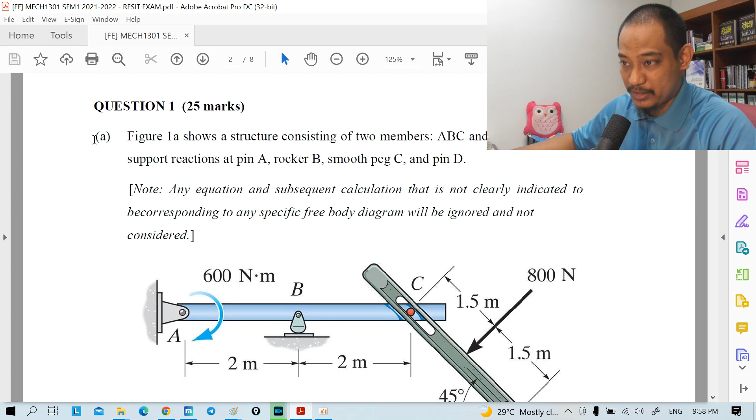Alright, so let's take a look. We have 4 questions. Question 1 is 25 marks, with part A and part B. Question 2, 25 marks, with part A and part B as well. Question 3, also 25 marks, with part A and part B. And question 4, 25 marks as well, with part A, B, and C. And then we have the appendix with a table.

So meaning what? We have 4 questions, and under each question there are multiple parts, but each question block is allocated 25 marks, meaning each question carries a quarter of the full marks for the final exam. So in terms of time allocation, we can divide the 3 hours into 4 equal portions: 45 minutes, 45 minutes, 45 minutes, and 45 minutes.

So without further ado, we'll go straight to question number 1 and allocate 45 minutes for that at most. So it should be done before 10:45. Let me note down here: from 10 to 10:45. I'll take note of the time as such, even though we actually began 3 minutes before 10, so we'll just minus 3 minutes. But it's easier for me to think of it as 10 to 10:45.

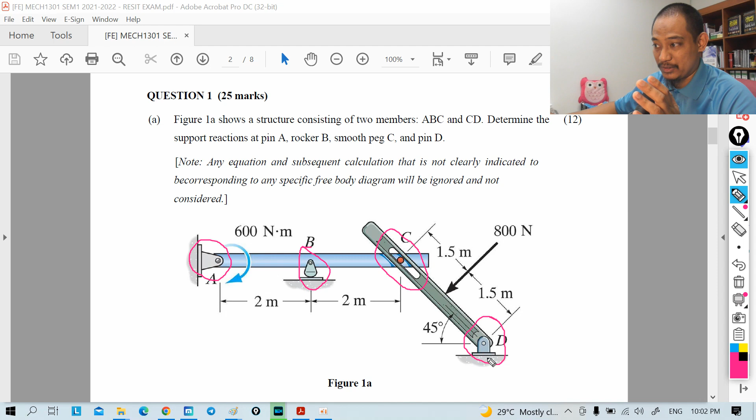So you have a support reaction or normal reaction there, and then at pin D, we'll have this is a pin, so we have X and Y components. So that is what we need to find. So let's proceed to answer this one.

Alright, let's put this here. We'll first take note of what is the important information, and then we can answer. So this is Bismillah, question 1A.

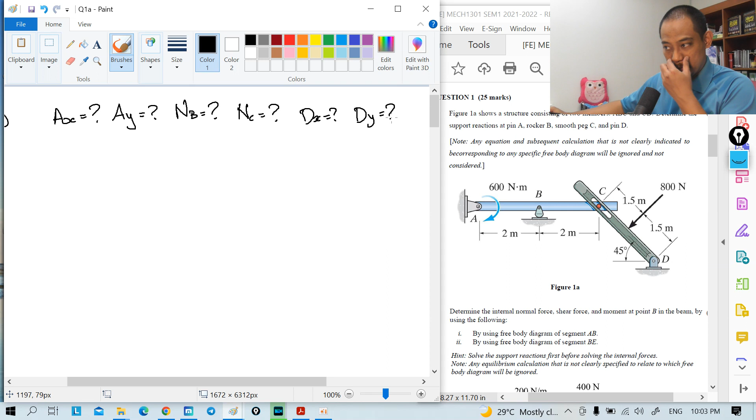We have to find AX, AY, and then NB, and then NC, and DX, as well as DY. So those are the unknowns that we have to find at A, B, C, and D.

Let's first draw the free body diagram. We have two members, so free body diagram. On the left we have this member, where we'll have AX and AY, and then we have a moment there, and we have a normal reaction at B, and support reaction at point C here.

That will correspond to that member there. Okay, something like this. So this corresponds here, and then we have a force like this, and then we have DX, DY. Let's assume this direction. Here it is 800 Newton.

This is a normal reaction, so we have normal C, so corresponding to it we'll have something like this, normal C. And then here we have NB, so we have AX, AY, and the value is given as 600 Newton meter.

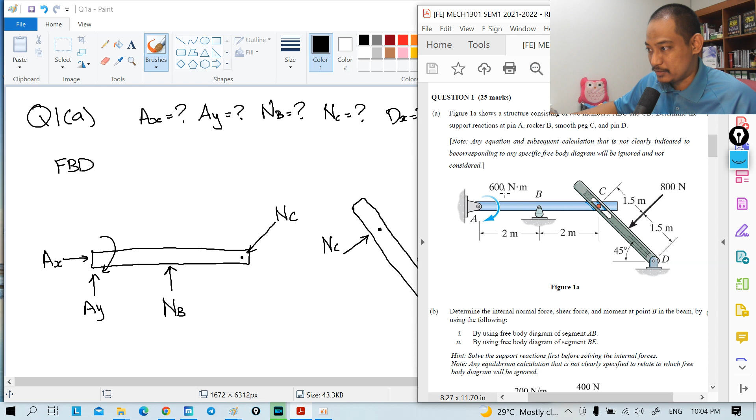600 Newton meter, and in terms of distance, this is 2 meters. This distance is also 2 meters. Of course, this is not really at the end, but it doesn't matter because this point is what is important.

So this one is DX DY, and in terms of distance, this is 1.5 meter, and this is 1.5 meter. I'm sorry, my handwriting is so bad tonight.

And then we have the angle here. This is quite messy. The angle here is 45 degrees, meaning this angle is 45 degrees, and this angle is also 45 degrees.

So we have two free body diagrams, and the rest we can calculate, so we'll just focus on this. Let's label this as free body diagram ABC. This is member ABC, let's call it, and this is member CD.

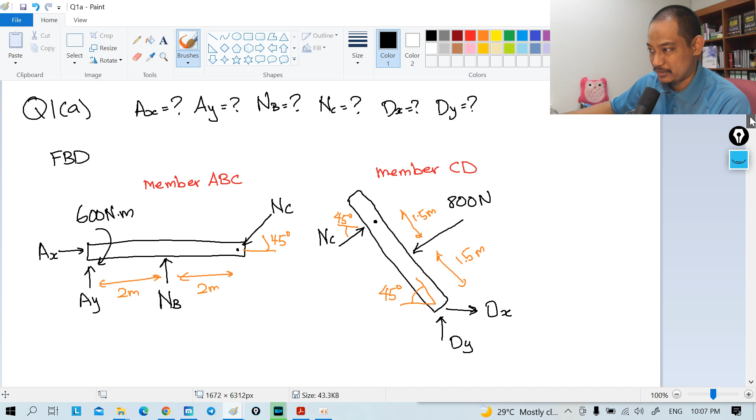Using the free body diagram of member CD, we'll begin with moment about point D. Summation of moment about point D equals 0. Let's take counterclockwise as positive.

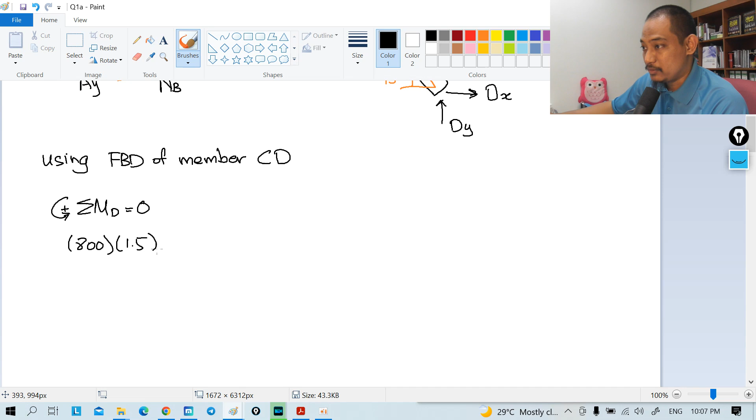So 800 times 1.5 is perpendicular straight away, so NC - in this case it's perpendicular as well. That angle doesn't matter because let's check with the original diagram. Is it perpendicular? Yes, because the slot is parallel to this one here, so the reaction should be perpendicular.

So we'll have straight away minus NC times the distance of 3, equal to 0. So NC equals - bring to other side, divide - becomes 400 Newton. So NC is one of the answers, 400 Newton.

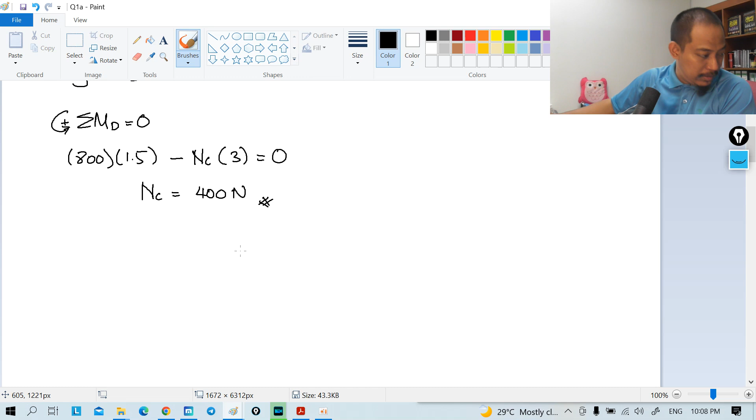Next is summation of Fx equal to 0. If we take positive to the right, we want to solve for DX. So there we will have DX to the right, and then minus 800 Newton. The angle will be the same because this would still be 45 degrees. So minus 800 cos 45 degrees, and then we have NC plus NC cos 45, and NC we already have as 400, so plus 400 cos 45 degrees equal to 0.

So what's my calculator? We have minus 800 times cos 45 degrees, plus 400 times cos 45 degrees, and bring to the other side, so DX equals 282.84 Newton. Let me double check: minus 800 times cos 45 plus 400 times cos 45, 282.84.

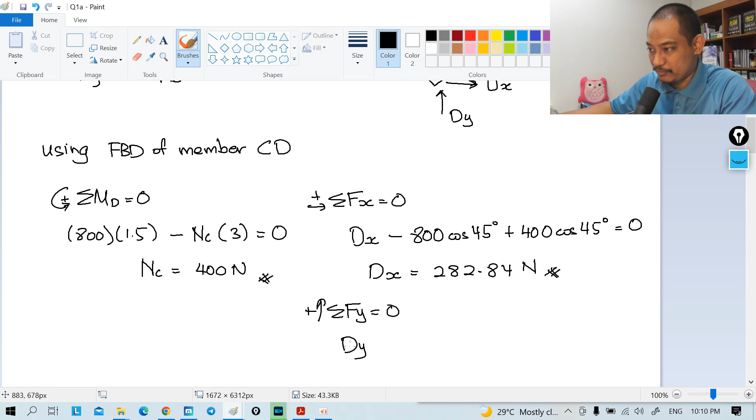Right, so that's one of the answers as well. Next, summation of Fy equal to 0, upwards as positive, so we'll have Dy and then 800 downwards sine 45, so minus 800 sine 45 degrees, and then we have NC upwards sine 45, so plus 400 sine 45 degrees equal to 0.

So from here, Dy equal to minus 800 times sine 45 degrees plus 400 times sine 45 degrees. It should be the same, right? Because sine and cosine is the same. So bring to the other side, so you have 282.84 Newton. That is the answer for that one.

So we have solved 3, we need to solve 3. So now we go to member ABC. Now, from free body diagram of member...

ABC. Now, is it compulsory to write this statement? If you are in my class, it is compulsory, because any equation that is not clear, this is linked to which free body diagram, I'll just ignore it, right? So if you're my student, you know that policy from the beginning. Meaning that if you do not draw any free body diagram, then I'll ignore everything. If you draw like this, you have two free body diagrams but there's no label, and then suddenly a question comes up and I'm not sure this is linked to which, I'll just ignore as well. So make sure it is precise to show that you understand what's going on and it's not random and coincidental.

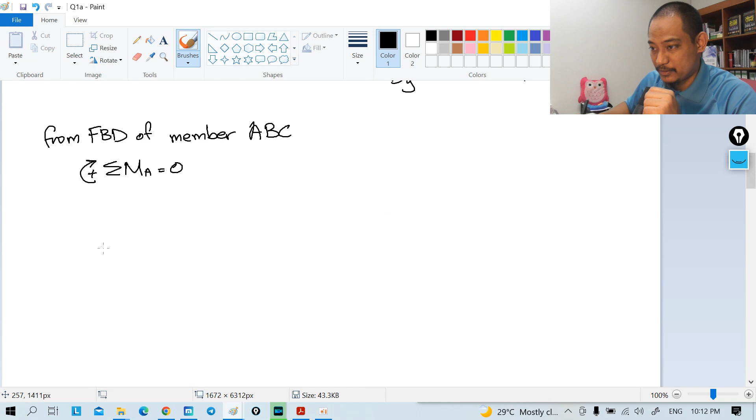Alright, so here we'll take moment about point A. Summation of moment about point A equal to 0. Let's take, because that 600 is clockwise, so let's take clockwise as positive. So we will have that 600, and then NB is counterclockwise, so negative NB times 2, negative NB times the distance of 2. And then for this one, horizontal NC, horizontal doesn't produce any moment, the vertical one produces, so that's clockwise. So NC sine 45 times 4, and NC we already solved, right? So 400, so plus 400 sine 45 degrees with the distance of 4, that should be equal to 0.

So we have 600, we have NB, and then we have NC. And then just straight away calculation. So 600 plus 400 times sine 45 times 4, you have a number, and then bring to the side, divide by 2, you have NB equal to 865.69 Newton. Double check: 600 plus 400 times sine 45 times 4 and then divide by 2, 865.69.

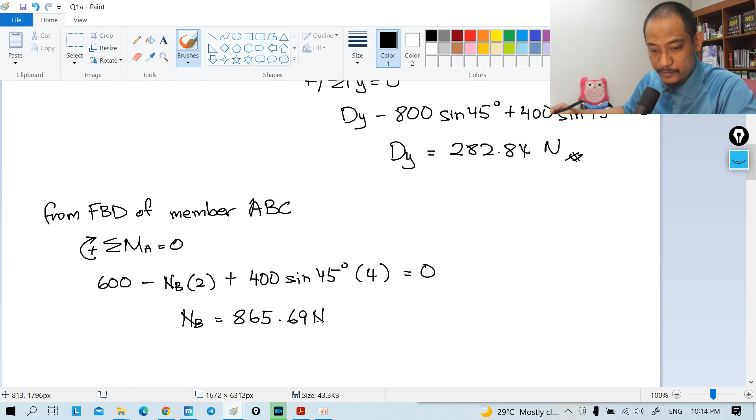Then summation of Fx equal to 0, positive to the right. So you have Ax, and NC, right? So nothing else except NC to the left, so minus NC cos 45, so minus 400 cos 45 degrees equal to 0. So this is straightforward, so 400 times cos 45 degrees, so you have Ax equal to 282.84 Newton, right? So there you go, is this 400 cos 45.

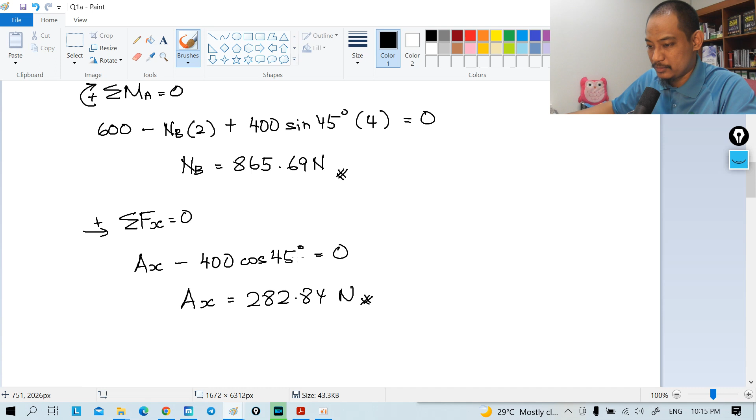Alright, and then we have summation of Fy equal to 0, taking positive upwards. So you will have Ay, and then plus NB, and NB is that one, right? That one, so plus NB, so plus 865.69, and then minus NC sine 45, so minus 400 sine 45 degrees equal to 0.

Minus sine 45 degrees. Alright, so in that case Ay equal to, so if you calculate 865.69 minus 400 times sine 45, so bring to the other side, so it becomes negative, right? Negative 582.84 Newton. Negative means Ay is actually downward. So it means it is downward.

Alright, so we have 6 unknowns that we have to solve. So 1, 2, 3, 4, 5, 6. Alright, so that's for question 1A. Hopefully that's clear and no problem there. We'll go straight to question 1B.

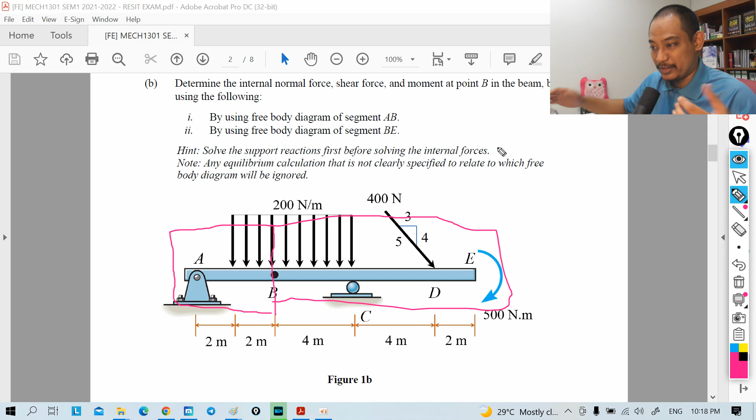You should know that in this case, either side you have to solve this one and this one, right? Because otherwise you cannot solve. So it should be based on understanding. But here the question really wants to give the student the chance to know where to start.

So solve the support reaction first before you can cut into the internal loading. Note, any equilibrium calculation that is not clearly specified to relate to which free body diagram will be ignored. Make sure you specify this equation is based on or for which free body diagram.

Alright, so first we will draw a free body diagram of this whole thing, and find the support reaction first before we can find the internal loading.

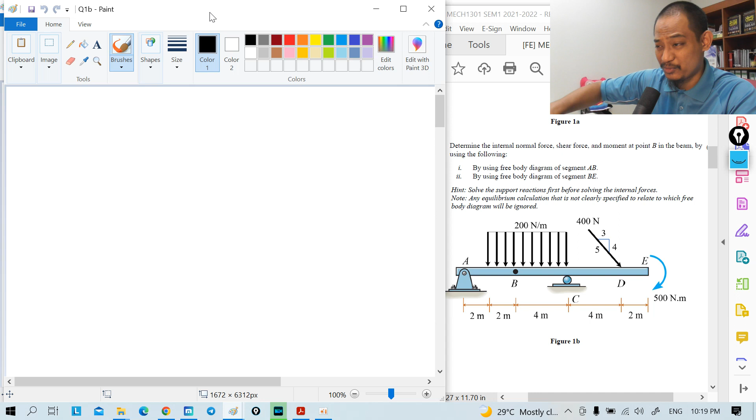So this is question 1B, right? So we need to find what we need to find: internal loading at B. So basically we have to find NB, VB, and MB, right? That's what we need to find, and we have two parts, part 1 and part 2.

But before we solve any of the parts, again we have to solve the support reaction of the whole thing first. So first, free body diagram of the whole thing. So we have the whole bar there.

We have support, we have distributed loading there, right? So now we have AX and AY there, and we have a force here, and then we have the normal reaction here, and then we have a force in this direction, and then we have a moment there. This moment is 500 Newton meter.

This is 400 Newton with 3, 4, 5 triangle here. 3, 4, 5. And here is C.

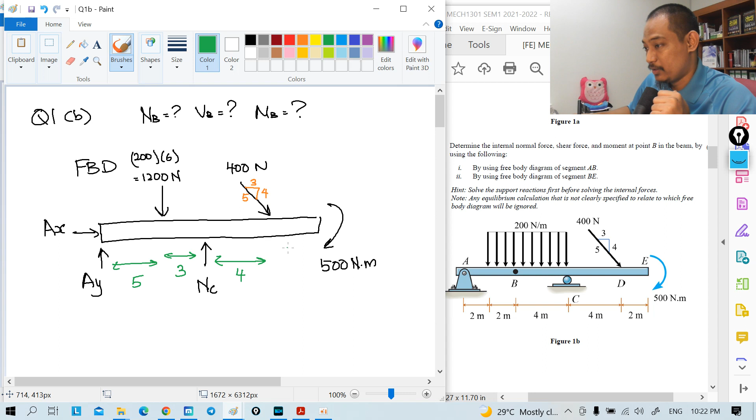This distance here is not important. You can put it, but it's not important because it doesn't affect the calculation. All right, so this is point A. So of course we will start with

solving for moment about point A. So summation of moment about point A equal to 0, we will take because this is clockwise, this 500 - normally I'll just follow what's there so that it is straightforward positive, right? So that way, if we go part by part,

we have 1200 here positive, so 1200 times the distance of 5, and then NC here negative, so minus NC times the distance of 5 and 3 is 8, and then this one - okay, we do not have any thickness, right? We don't have any thickness,

so meaning that this 400, the horizontal one doesn't have any moment, doesn't produce any moment about point A. The vertical does, so, and it is clockwise, so plus 400 - we have the vertical one becomes 4 over 5, and then the distance is 8 plus 4, 12, right? So 400, 4 over 5, and then 12, and then plus 500 Newton meter there.

All of this should equal to 0, so from here you can calculate what is NC. I'm sorry, I have a sore throat, so I hope your eardrums do not get damaged by me coughing here.

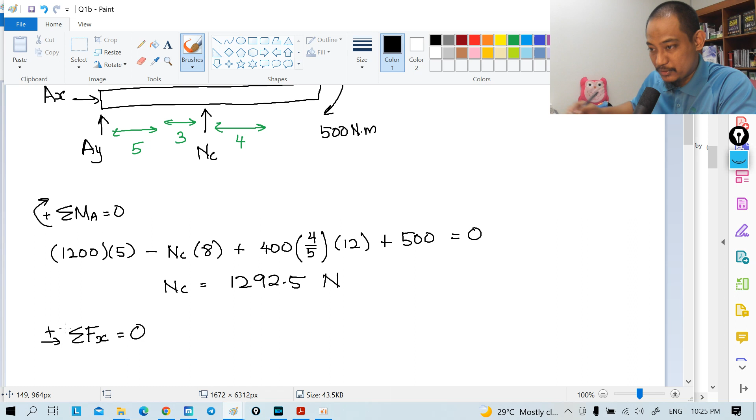So we are still finding support reaction. Summation of fx equal to 0, taking positive to the right, so we'll have ax, no, and then we have that 400 to the right, so plus 400, 3 over 5 equal to 0, right? It's 3 over 5, correct? Horizontal 3 over 5.

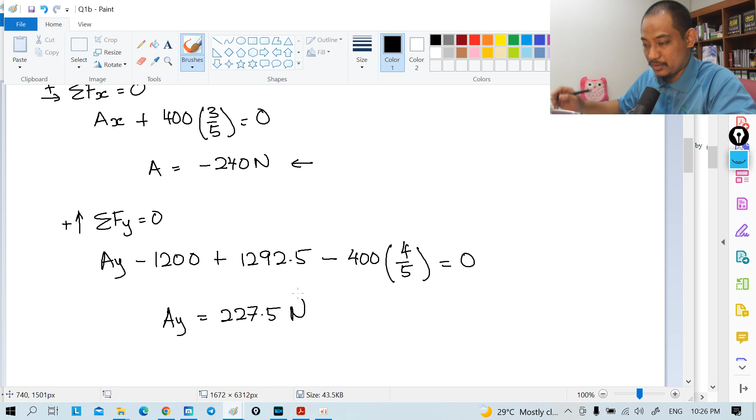Minus 227.5, bring to the other side, positive 227.5. So obviously it is meaning it is upwards as expected, and C of course upwards. Okay, so now we have support reaction.

So we go to, okay, first part 1 is free body diagram of segment AB, right? So segment AB. So free body diagram of segment AB. Okay, so we have to look at it.

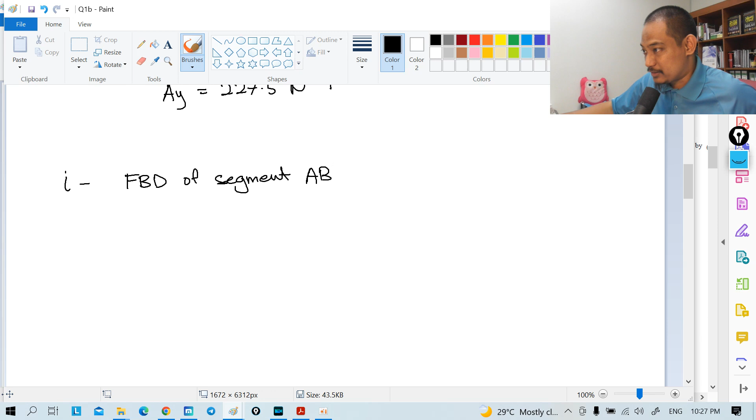So here, let's draw a free body diagram of that. So meaning this part here on the left, alright? So it is a short segment, something like this, where we cut it at B, meaning that we will have this, and then we will have this, and then we will have this, right? So MB, NB, VB.

Right? And then we have support reaction. Okay, let me see. AX is not to the left, to the right. Oops, what was missing? Oh, this one. So it should be to the left. Is it? AX. Where is this X? Okay, this is AX. Right? AX should be to the left, 240. So meaning to the left, 240 Newton.

AY upwards, 227.5, so upwards 227.5 Newton, and then we have this distributed loading, right? So make sure you understand that when we cut over here, meaning that this portion of distributed loading, this portion here belongs to this side, while this portion here belongs to the other side, right?

So you cannot take this one, 1200 is no longer valid, because 1200 is the whole distributed load. So when we cut here, the distribution is only this portion. So meaning that there will be a force here only for this portion. So you have 200 Newton per meter.

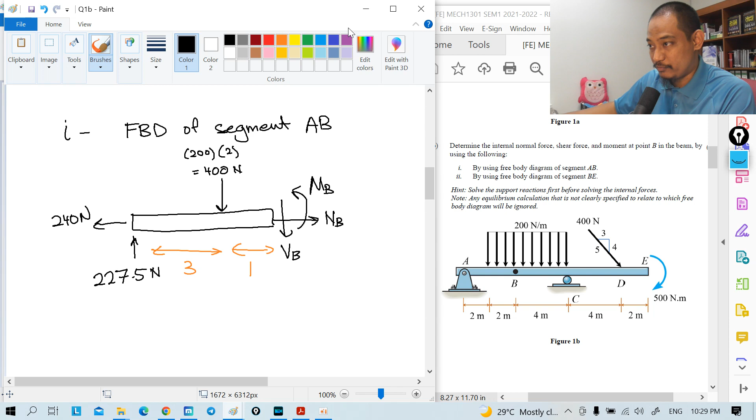So we have the free body diagram. Let's start with what is easiest one. Okay, summation of fx equal to 0, taking right as positive. So we'll have NB, and only this minus 240 equal to 0, so NB equal to 240 Newton. That's the answer.

So next, summation of Fy equal to 0, upwards as positive. So we have 227.5 upwards, and then minus 400, and then minus VB. That's all, equal to 0. So we have 227.5 minus 400 becomes minus 172.5, and VB brings to the other side, so then VB becomes minus 172.5 Newton. Yes, VB.

And if we want to calculate moment, so summation of moment about point B equal to 0, so we'll use the direction, the same direction as that one, so counterclockwise is positive. So we have MB counterclockwise, and then plus 400 times the distance of 1, and then minus 227.5 with the distance of 4, equal to 0, right?

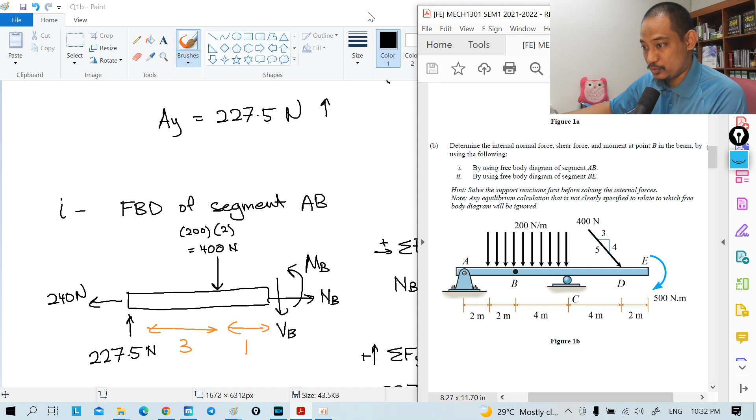And because we have I and II, right? So next we have to find on the right side. Alright, so okay, we'll do the free body diagram. So II, free body diagram of segment.

Okay, free body diagram of segment BE. Alright, so let's draw the free body diagram. So it will be something like that. Obviously it is cut here, so you'll have it cut at point B there, right? So you have that one, and that one, right? So MB, VB, and NB.

So I'll begin with here. So this is 500 Newton meter.

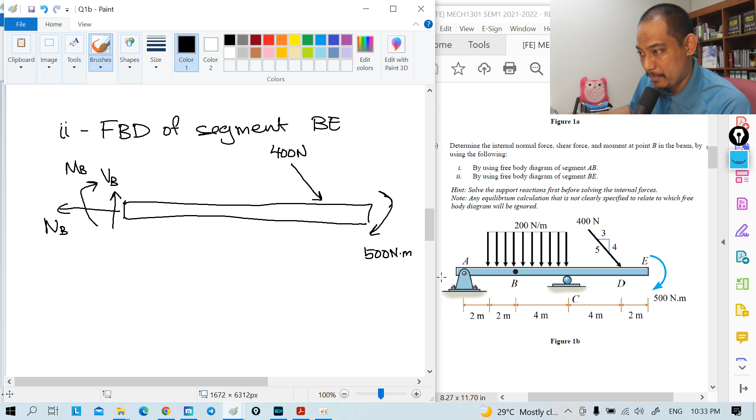Okay, and then we have something like this, where this is 400 Newton, and then we have that, and NC upwards. NC is already, we have already known the value, right? So we have to write the value.

1292.5 Newton. 1292.5 Newton NC, right?

And then we have the distributed loading, meaning that it should be at the middle here, because it is middle between, meaning from C to B, the whole thing have distributed loading, so it's in the middle with the distance of 4, right? So we have 200 times 4 equal to 800 Newton.

Of course the total, because when we divide this way, for this free body diagram we have 800, for the above free body diagram we have 400. The total should be 1200, right? Because it's separated left and right like that.

So the distance, this distance is given as 4. C and D is 4. The angle here is 3, 4, 5, and this should be divided between 4, meaning this 4 meter divided by 2, right? So meaning that this is 2, this is 2. Okay, that's the free body diagram.

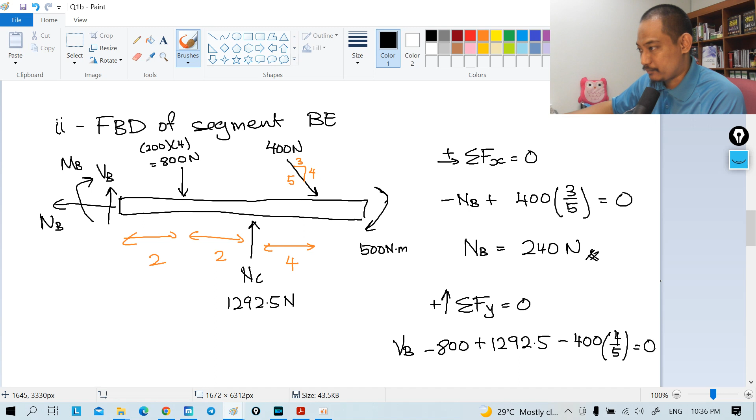Right, so if you calculate this one, minus 800 plus 1292.5 minus 400 times 4 divided by 5, you will get 172.5, and you bring to the other side, so it becomes negative 172.5 Newton. It should be the same, negative 172.5, is it? Negative 172.5. Alright, alhamdulillah.

Then summation of moment about point B equal to 0. Is it point B? Yes. And we take clockwise as positive. So now we have this on the left, MB there, so we have MB.

And then this 800 is also clockwise, so plus 800 times 2. And then this 1292.5 is counterclockwise, so negative, minus 1292.5.

The distance is 4. Right, and then we have this 400 downwards, 400 times 4/5, so plus 400 times 4/5, and then the distance is 8. And then we have also 500 clockwise as well, so plus 500 equal to 0.

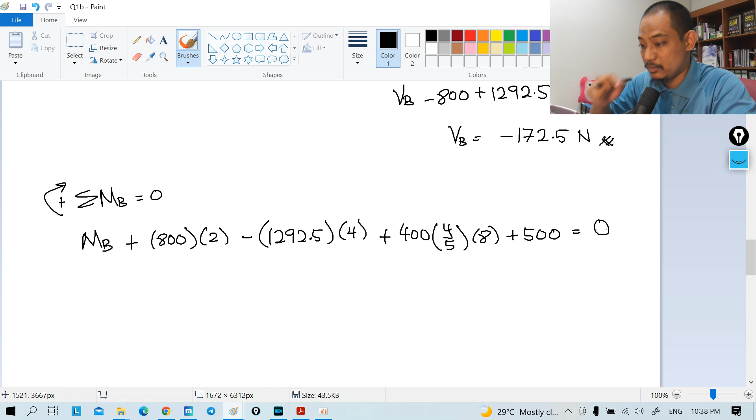So a lot of things to add here. So let's see: 800 times 2 minus 1292.5 times 4 plus 400 times 4 divided by 5 times 8 plus 500, minus 510, bring to the other side, becomes positive. So MB equal to 510 Newton meter.

Is it the same as above? 510 Newton meter. Alright, so this is the same. So we have answered the 3 internal loadings for both 1 and 2.

So have we answered everything for the question? This is question 1B. Alright, we have covered everything, right? Determine the internal loadings, blah blah blah. Okay, we have covered everything. Alright, so next is question 2.

Right, so for question 1 we have finished. What's the time now? It's 10:39, we should be until 10:42, so 3 minutes. Actually to solve this question, while talking like this, it takes almost the full 45 minutes. At the beginning we actually use that 45 minutes to discuss a little bit on the number of questions, etc. If you go straight away, it should be more sufficient, and you have time to check and double check. Throughout the calculation I've already shown also that we keep on checking, so we have enough time to check. Make sure you do not have any mistake.

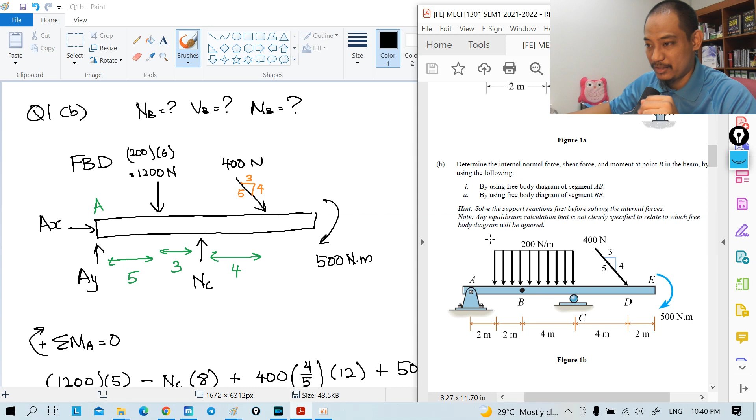So that's question 1B. Moving on to question 2. Okay, this is question 2A.

So let's read the question. We are at 10:42, let's consider that 10:40. If we start at 10:40, we should finish before 11:25. Of course, normally I'll try to add another buffer because it's actually 10:42, but let's assume we start at 10:40 because maybe after that question you have 1-2 minutes to recharge or something.

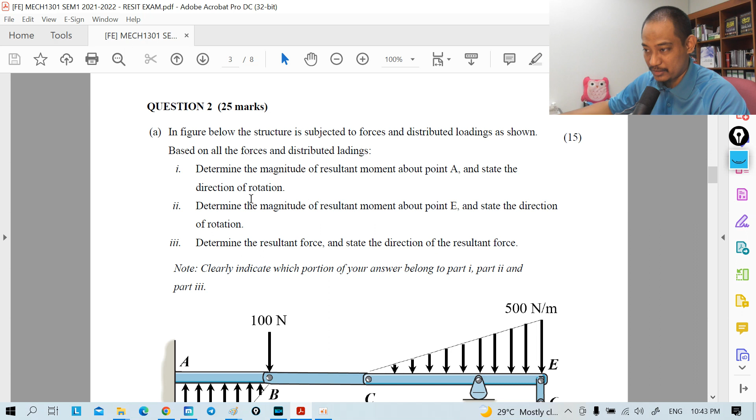Alright, in the figure below, the structure is subjected to forces and distributed loadings as shown. Based on all the forces and distributed loadings, determine the magnitude of resultant moment about point A and state the direction of rotation. Number 2, determine the magnitude of resultant moment about point E and state the direction of rotation. Number 3, determine the resultant force and state the direction of resultant force. Note, clearly indicate which portion of your answer belongs to part 1, 2 and 3.

Right, okay, this is the diagram. And okay, because we cannot see everything together, is this okay? I hope you can still read this one.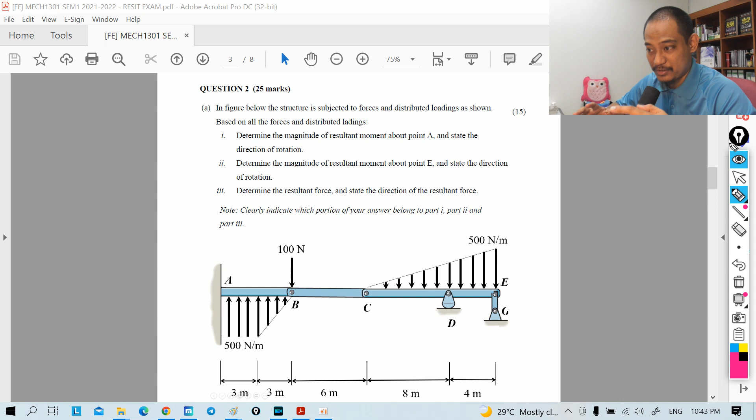Note that this is where I think the understanding of what the question wants comes into picture. Because just by looking at the diagram, some students may actually think that this is asking for support reaction, for example, so they want to find support reaction at this point, that point, etc. But the question does not even ask for support reaction. It just simply asks for resultant moment about point A, resultant moment about point E.

And we are not talking about support reaction here. We are talking about all the forces that you can see, meaning these forces, this force, and these forces. So make sure you understand first, and if you are not clear, raise your hand and ask the lecturer, do you understand the question correctly? You cannot ask for the answer, because the lecturer will not give you the answer, but to understand the question you should be able to ask, and the lecturer will answer properly so that you understand.

So it says, based on all the forces and distributed loading, find the magnitude of resultant moment about point A. So about this point, what is the summation of moment? That's simply it. And second, magnitude of resultant moment about point E, so about this point. And number 3, resultant force, that's simply just summation of forces. So that's important. So let's go and solve this question.

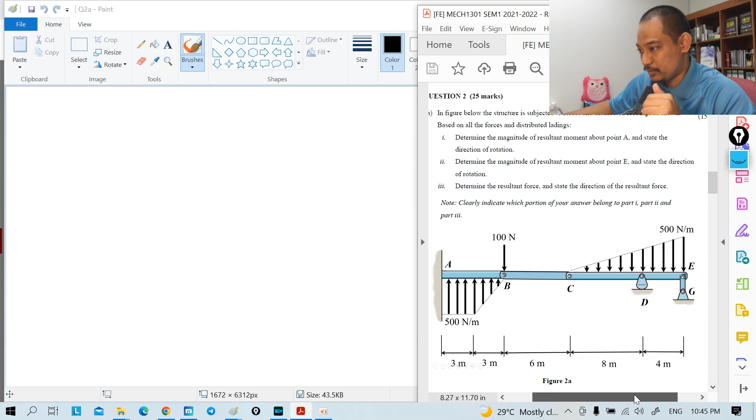Alright, so that's the diagram. Hopefully you can see. Okay, so this is question 2A. Let's see the question at the same time.

Alright, so in this case, we do not even have to draw any free body diagram actually, because the question simply asks for resultant moment. Now, free body diagram is a must for equilibrium questions - before you have summation of force equal to 0, you have to have free body diagram. But this is not about equilibrium, this is just what is the moment, what is the summation of moment.

So but to be able to do that, you have to resolve the distributed loading first. So we have basically, if you take a look at this, it's a combination of this and then something here, and then another something here, where it has something here, it has something here, it has something here, and then this is fixed, but that's not important.

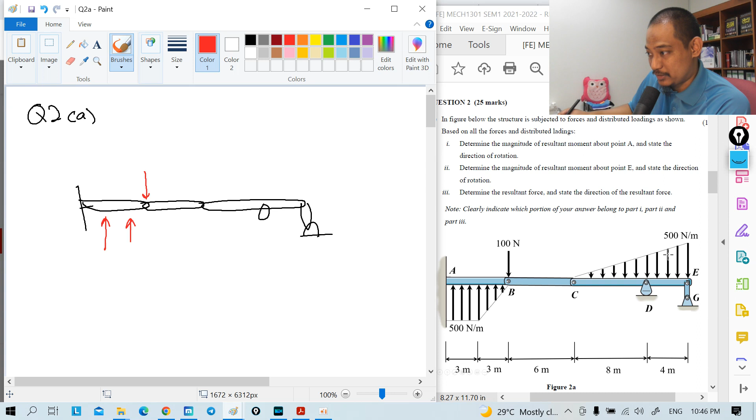What we want to know is, okay, this one you can divide into this rectangle and triangle. So the rectangular will be one force, the triangle will be one force there, and then we have one force downwards exactly at that point, and then this whole thing is a triangle. Let me see, this whole thing is 12, so 1/3 of 12 is 4, so it's exactly there, coincidentally, in terms of the value.

So this is straightforward, 100 Newton. This one is basically half times 500 Newton per meter times the total distance of 12 meters, so you get 1 divided by 2 times 500 times 12, equals 3000 Newton. Okay, that's a lot. Just verify: 1 divided by 2 times 500 times 12. Of course, because it takes a long distance there, it becomes big.

And then for this one, a triangle as well, it is half times 500 Newton per meter times distance of 3, equal to 1 divided by 2 times 500 times 3, equals 750 Newton.

Okay, this one is simply 500 times the distance of 3, so 1500 Newton, right? What about the distance?

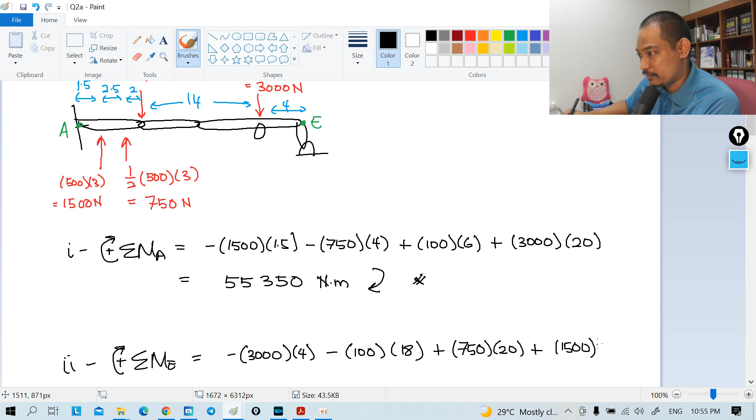Then you add all of this together: minus 3000 times 4, minus 100 times 18, plus 750 times 20, plus 1500 times 22.5. So you'll get 34950 Newton meter, also clockwise because it's positive.

34950. And next we have to state the direction, and then summation of forces. So more is going down, but okay, let's just use the normal.

1500 plus 750 minus 100 minus 3000, so it becomes minus 850 Newton, meaning downwards. So you just state the direction as downwards.

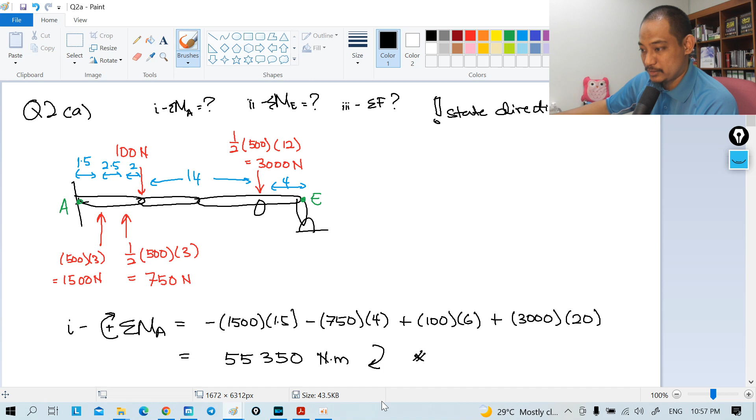So is that all that is asked in this question, part 1, part 2, part 3? Okay, so that's question 2A. We can move to question 2B.

Question 2B, let's take a look. Okay, this is question 2A that we have solved, and this is question 2B, but I'm not sure why my draft is stating this is part A, so this should be part B. Alright, so we have here the pruner multiplies blade cutting power with the compound leverage mechanism.

So it's talking about this thing here. If a 20 Newton force is applied to the handle, as already shown here, 20 Newton, determine the cutting force generated at A. So A is here, right? The thing that is being cut. Assume that the contact surface at A is smooth.

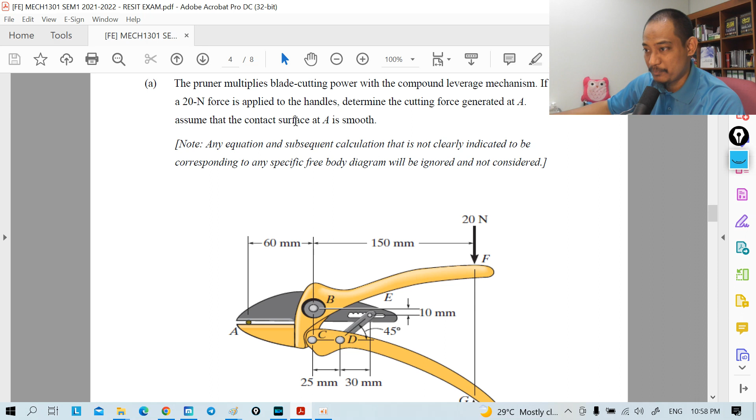So this is smooth. Note, any equation and subsequent calculation that is not clearly indicated to correspond to any specific free body diagram will be ignored and not considered. So whatever is mentioned here is already given, and we need to draw the free body diagram. This is an equilibrium problem. Draw the free body diagram and solve for all the forces.

Let's take a look at question 2B. So we have several components here, and if you have taken the course, you have seen this before. It is in your textbook. You should know how to draw the free body diagram by now.

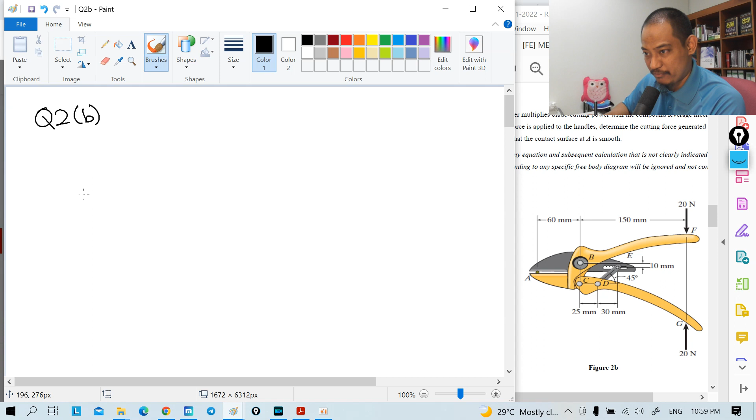If you do not know, meaning you haven't tried the question in the book. Alright, so if I'm just to draw every member that is there, so there's one thing like this, that's the gray thing there. Is it too big, my drawing here? I'll try to make it smaller. Normally I like to draw it big because it's easier to see the distance, etc., but here on the screen we do not have enough space. Okay, and then we have this thing here, roughly something like this. Of course this is cutting the thing there.

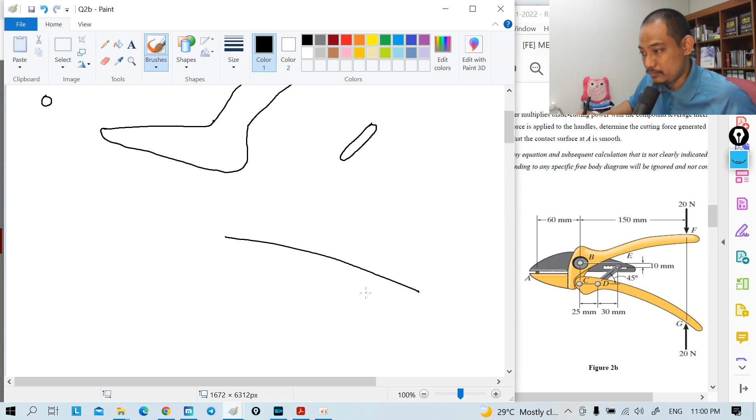And then we have that thing there, this thing DE here, and then we have this thing there, something like that. Alright, so all the forces. Of course this thing is being cut, so we have force like that. Let's call that FA. So the corresponding here, it should be upwards, FA, and here should be downwards.

It should be downward, FA. Where to start? This member DE, if you can imagine, this is being compressed, so it is under compression. So it is being compressed like that, because this is a two force member. FDE, so it should be just along that line, meaning along that 45 degrees line, because this is...

45 degrees. Right, so this corresponds to here. So it will be something like this, FDE, and it also corresponds to here, FDE, and of course you know the angle 45 degrees, this angle 45 degrees.

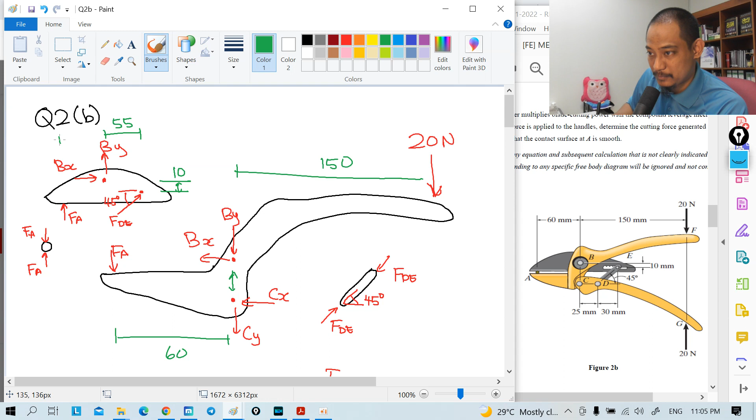So all the things is there, and we need to find what we need to find. What do we need to find? Determine the cutting force at A. So what we need is FA, right? FA is what? That's the only thing that is asked. Just to verify again. Determine. That's the only thing that you need to determine, right?

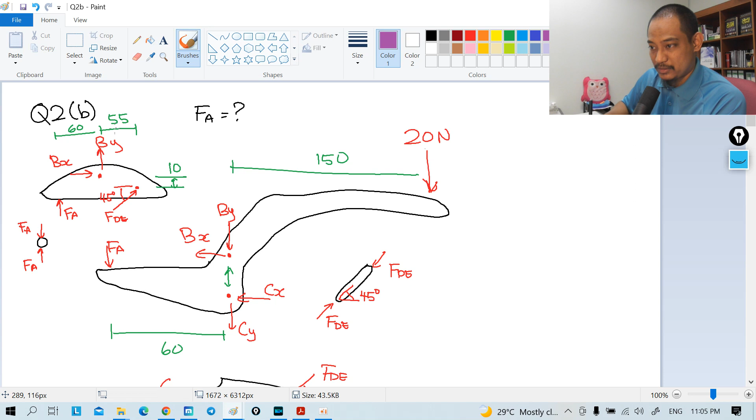So let's label this. Let's say this is free body diagram 1, this is free body diagram 2, this is 3, this is 4. Normally where we start is where we have a value. So for example here, if you have 20 Newton, okay, this is 20 Newton. So we can start here, but this is too many unknown. Or we can start here, and here we have 3 unknown, right? So we can solve. So we start with free body diagram 4.

So using free body diagram 4, we have summation of moment about point C here. Moment about point C equal to 0. Let's take counterclockwise as positive. So in this case we have 20 here times 150, so 20 times 150 positive, and then here the horizontal, it's along the same line, so it doesn't produce any moment, so just vertical. So FDE sine 45, so minus FDE sine 45 degrees, and the distance would be 25, equal to 0, right?

So based on this, we can calculate. Bring to the other side. So 20 times 150, divide by 25, and then divide by sine 45. So FDE equal to 169.71 Newton. This is Newton or kilonewton? Newton. 169.71 Newton. Now we have solved that one.

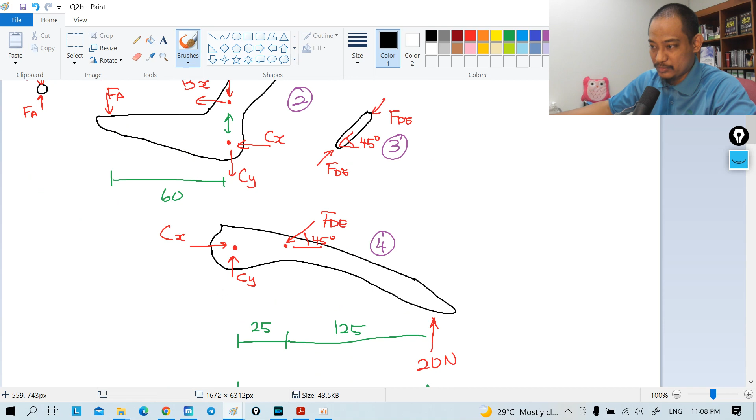We can then solve Cx and Cy. But just to check whether we need to, because what we are concerned about is just Fa, right? So of course, just having FDE, it doesn't resolve for this free body diagram 2, but we can use free body diagram 1 because FDE is now known, and here we have only 3 unknown there, so we can solve free body diagram 1, right? So then using free body diagram 1, we'll take moment about point B.

Okay, I'll just take this one so that we do not need to keep on scrolling, right? Copy, paste. Okay, just for reference. So based on this, we can do a summation of moment about point B equal to 0. Let's take counterclockwise as positive. So in this case, both horizontal and vertical will produce moment about point B.

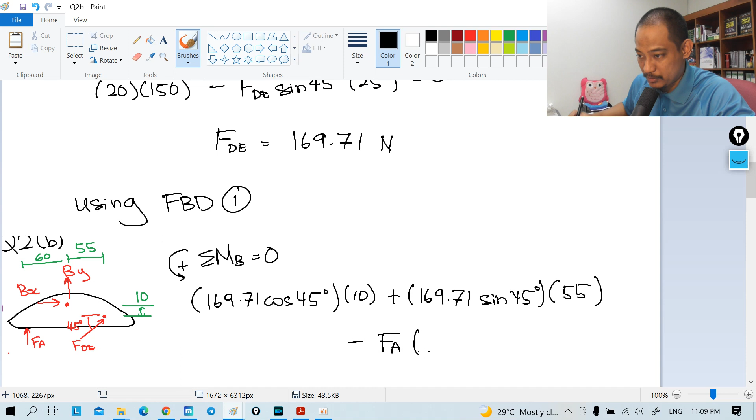So for the horizontal, because FDE we have already, horizontal FDE cos 45, meaning 169.71 cos 45 degrees, that's this one, and the distance is 10. It's counterclockwise, right? And then vertical one, of course, is also counterclockwise, so plus 169.71 sine 45 degrees times the distance of 55, and then we have FA, which is clockwise, so minus FA times the distance of 60 equal to 0. Right, so based on this, you can calculate.

So 169.71 times cos 45 degrees times 10, you get a value, and then plus 169.71 times sine 45 times 55, you get some value, and then you divide by 60. So FA, you get 130.00 Newton. So 130 Newton, that's the answer, right? So just verifying. 169.71 times cos 45 degrees times 10 plus 169.71 times sine 45 degrees times 55, and then bring to the other side and divide by 60, so we get 130.

So that's the answer, because that's what we need, right? FA. So that's question 2B. Okay, so we have solved question 2B, because next is question 3.

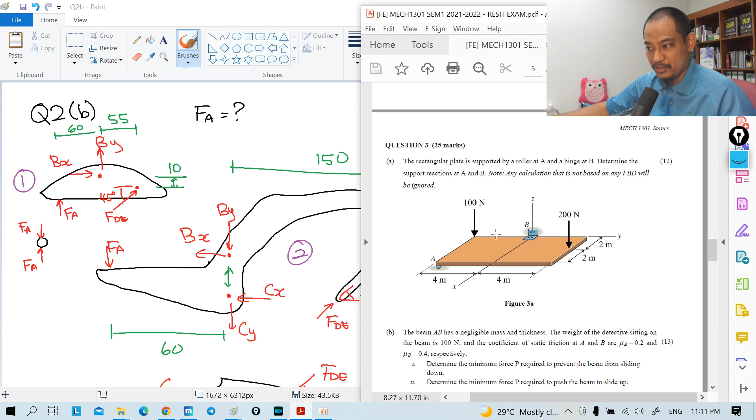Alright, so according to the time, 11:11, the time allocated for this one is until 11:25. So we actually have another 14 minutes extra from question number 2 that can be used for other questions, of course.

Right, so that's question number 2. Let's move on to question number 3. Okay, this is question 3A. Now let's take a look at the time first. So we have 11:12, let's consider if we started at 11:10. If we have 45 minutes, that goes to 11:55, so I should finish this by 11:55, for 45 minutes for question number 3 as a whole. So going for question 3A.

The rectangular plate is supported by a roller at A, so there's a roller here, and a hinge at B, there's a hinge there. Determine the support reactions at A and B, so at this point and at this point, right?

So this one, a roller, so you should know that is support normal reaction upwards. This is a hinge. Hinge meaning that you can rotate only one axis, the other two axes you cannot rotate, and in terms of lateral movement, no movement is there. So meaning that you have five unknown support reactions there, and another one at A, so we have 6 unknowns in total. So determine the support reactions at A and B.

Any calculation that is not based on any free body diagram will be ignored. All right, so question 3A. So what we need is all the unknowns basically. Yeah, so free body diagram.

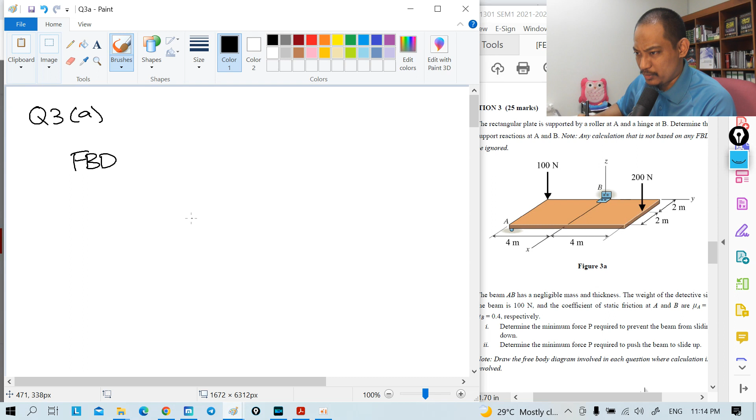So how to draw this? So we have something like that, something like that, something like that, and then we have something that's just to draw so it looks 3D. And let's just consider the axis. So its origin is here, and then we have the x-axis here, y-axis here, z-axis upwards.

And then we have the forces. So one force downwards here, 100 Newton, one force at the middle here, 200 Newton. Then the rest is support reaction. So we have here and A. Okay, the way I draw it, it doesn't have any space here.

So okay, let's make this go down a bit so I have enough space. Okay, so support reaction here. So this is point B, right? So you have BX, BY, and then BZ. So it cannot move anywhere, so you have those 3 unknowns, and then it cannot rotate about X, so MBX.

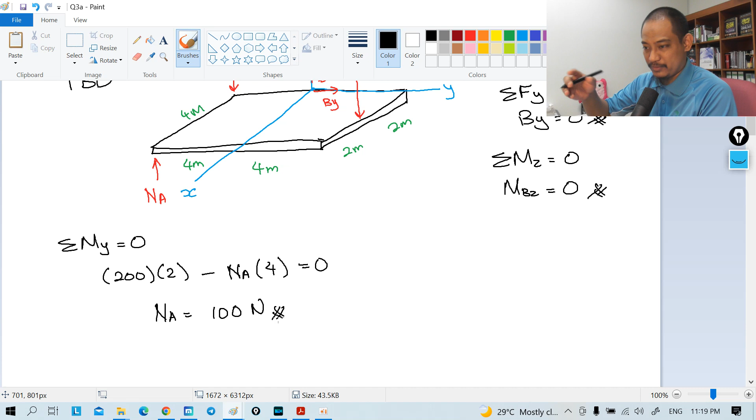Because 2 divided by 4 is half, then times 200 is 100. Should be correct.

Now if you have solved all that one, you can solve for the next part. Let's do down here, summation of Fz equal to 0. So basically you have NA upward, so 100 there, and then you have 100 downward, so minus 100, and then you have 200 downward, so minus 200, and then you have that Bz over here upwards, so plus Bz equal to 0. So if you calculate that, 100 minus 100 minus 200, minus 200 bring over there, so Bz equal to 200 Newton.

So Bz is 200 Newton. So what else is left? Fx, Fy, Fz is done. Mz, Mx, right?

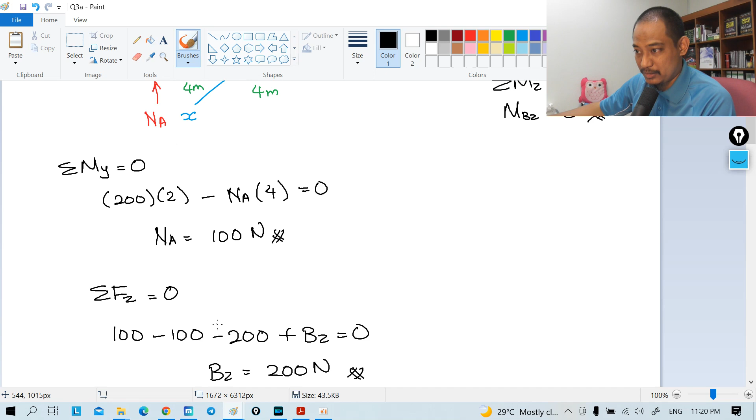Summation of Mx equal to 0. So you have MBX, MBX. And what else is rotating about X? All these forces are rotating about X, right? So we'll start with NA. NA is rotating clockwise, so it's negative. NA is 100, so negative 100 times the distance. What is the distance? This distance is 4.

And then this 100 is counterclockwise about X, also distance 4, so counterclockwise is positive. So plus 100 times distance of 4 as well. So it actually cancels out there, right? And then you have this 200 clockwise, so negative 200. Distance is also 4.

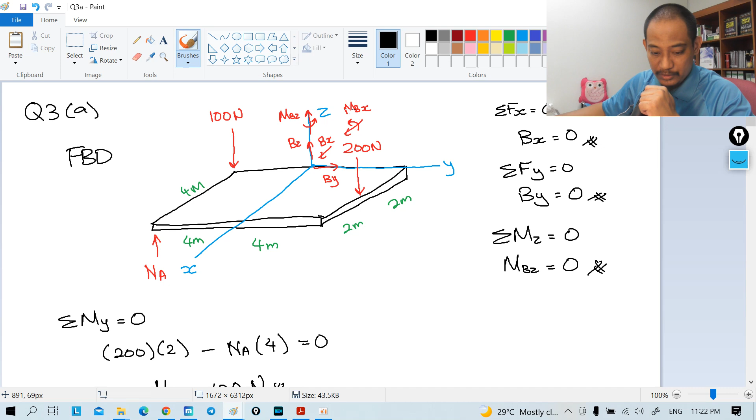What else? 1, 2, 3, nothing else rotates. Okay, so equal to 0. So meaning that MBX equal to, this is cancelling, this is minus 800, bring to other side, 800 Newton meter. And the direction is correct, right? Because we always assume all positive here, so it is positive. It is counterclockwise. So 1, 2, 3, 4, 5, 6. So we have 6 unknowns solved, right? Did we solve everything? So we have solved everything there.

Alright, so moving on to question 3b. The beam AB has negligible mass and thickness. The weight of the detective, so this is detective Pikachu here, sitting on the beam is 100 Newton. And the coefficient of static friction at A and B is mu A is 0.2, so at point A here is 0.2, and at point B here is 0.4 respectively. Determine the minimum force P required to prevent the beam from sliding down.

So what is force P here? The minimum force P to prevent from sliding down. And number 2, determine the minimum force P required to push up. And note that draw free body diagram involved in each question where calculation is involved, so you have to have the free body diagram.

Now, in this case, what differentiates between part 1 and 2 is the condition, because both are impending motion. When we say what is the minimum force to do something, that's impending motion. But number 1 is impending motion that the beam is sliding down, number 2 is it's sliding up, right? So meaning that sliding down, friction is preventing it from sliding down. When it goes up, friction is going against that motion as well, right? So that's how it differs in terms of free body diagram.

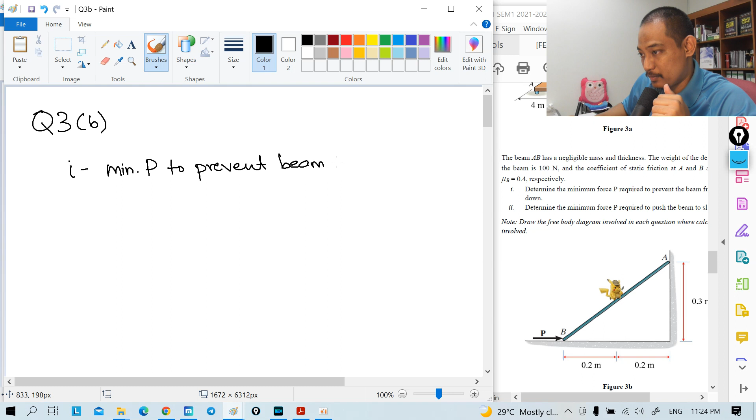Alright, so let's draw the free body diagram. Question 3b, number 1 is minimum P to prevent the beam from sliding down. Alright, so meaning what? Meaning that if you draw the free body diagram of the beam, of course the guy here, because in this case it's sitting right at the middle, right? So right at the middle here. Okay, let's use a different color.

So the weight is known, what is the weight? 100 Newton, right? And then we have a force P here, that is also given. And the thing is, if the beam is sliding down, okay, we for sure have normal reaction here, so this is NA, and normal reaction here, which is NB, right? So that's given because it's always there.

The difference is the friction, right? And if it's sliding down, meaning that the friction is preventing it from sliding down. So the friction is in this direction as well as this direction, right, to prevent it from sliding down. And the value of coefficient of friction at A is 0.2, so at impending motion it becomes 0.2 NA, and at B is 0.4, so becomes 0.4 NB. The rest is dimension, so we have this distance of 0.3 meter, and this is basically 0.2 meter and 0.2 meter.

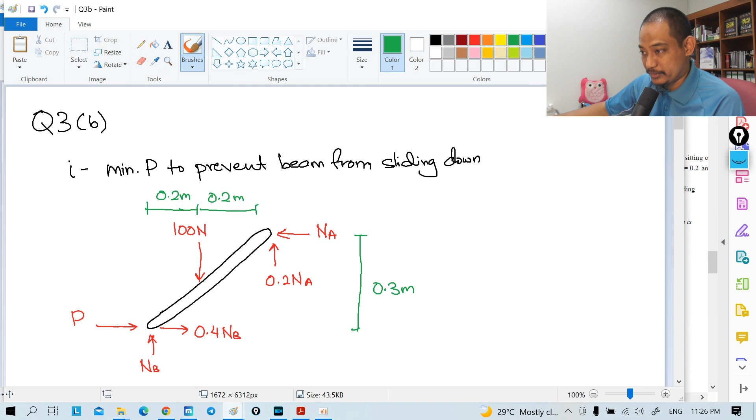Right, so that's what we need for part 1. So, okay, what do we do here?

Okay, if we take moment about point B, this is point A, right? So if we take moment about point B, we can solve for NA in this case. Summation of moment about point B equal to 0. Take counterclockwise as positive. So NA counterclockwise, NA times the distance of 0.3, and this 0.2 NA upwards is also counterclockwise, so plus 0.2 NA, this one with distance of 0.4. And then we have the 100 going down clockwise, so minus 100 with distance of 0.2. This is equal to 0.

So if we do this, first for NA part, 0.3 plus 0.2 times 0.4, you get 0.38. 0.38 NA equal to 20, right? 100 times 0.2 equals 20. So NA equals 20 divided by 0.38, which is 52.63 Newton. So that is the normal reaction at A.

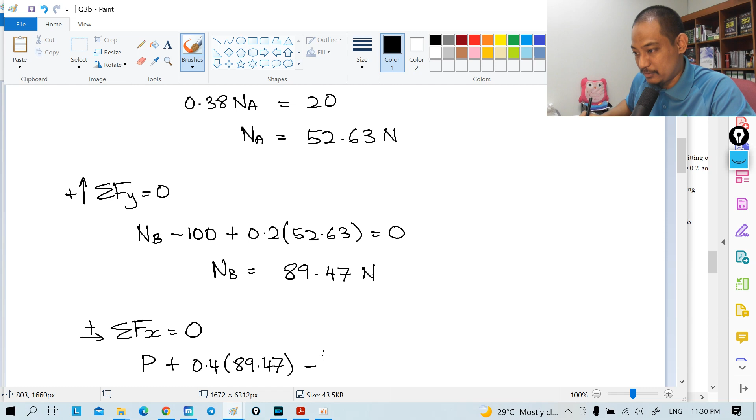Alright, so if we do then summation of Fx equal to 0, taking positive to the right, so we have P, and then you also have 0.4 NB. NB is 89.47 to the right, and then we have NA, which is 52.63, so negative NA, minus 52.63 equal to 0.

So with this, P equals 52.63 minus 0.4 times 89.47. You get 16.84 Newton. So that's the answer for the minimum P to prevent the beam from sliding down.

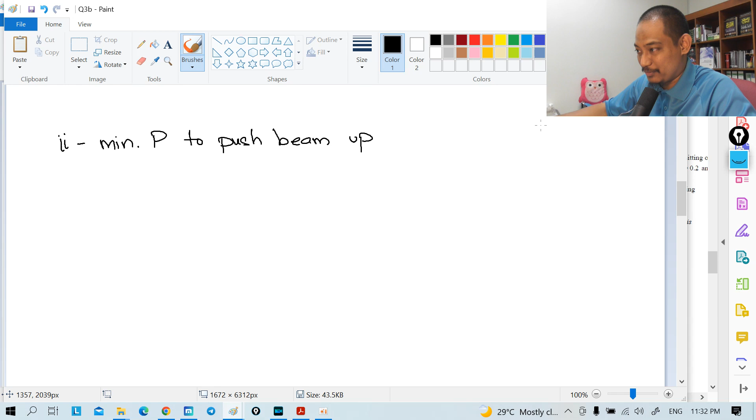Now, for the other part, minimum P to push the beam up. So number 2, minimum P to push beam up. Meaning that the beam is the same beam, and the force here is the same. So we have 100 Newton as the weight, and P is the same, that's given. N is the same, so this is NB and this is NA. But now the friction will be different, because now the beam is about to slide up, so the friction will prevent that, going this way. It wants to prevent it from sliding up. Mu A is 0.2, so 0.2 NA here, and this is 0.4 NB here.

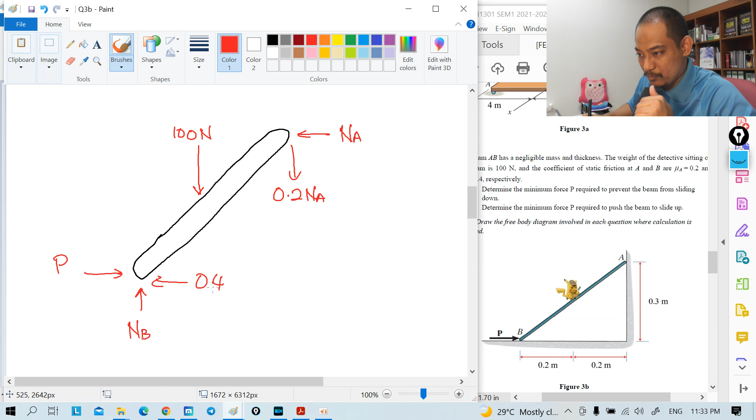So if you notice, compared to the above, the only difference is the direction of the friction. So next is the distance: this one is 0.3 meter, and then in terms of distance here, 0.2 meter, 0.2 meter. Alright, so we have all what we need there. Let's determine this. So based on this, the same steps will be applied, because we take moment about point B, this is A, this is B. So we'll take moment about point B first to be able to solve.

Summation of moment about point B equal to 0. Let's consider counterclockwise as positive. So what we'll have here is NA will be counterclockwise, NA times distance of 0.3.

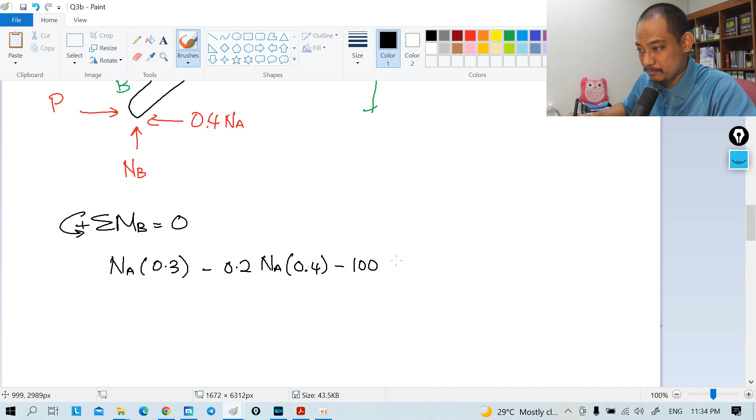NA and distance of 0.3, but 0.2 NA is clockwise, so it becomes negative. So negative 0.2 NA times the distance of 0.4, and we have 100 also clockwise, so minus 100 times 0.2 equal to 0. You'll notice that since the friction direction is different, the sign here is different compared to previously. That will change the value of NA. So here, if we have 0.3 minus 0.2 times 0.4, it becomes 0.22.

So 0.22 NA equal to 20. 0.3 minus 0.2 times 0.4, so 0.22. So 20 divided by 0.22, you get NA equal to 90.91 Newton. So now you have NA.

Wait, what is this? Okay, so I made a mistake in my drawing. This one is not NA, this one should be NB. How come I made that mistake? Never mind, because for this calculation so far it's not affected since we take moment, but at this point we do not consider all of this force now.

So NB itself, we can solve just like before: summation of Fy equal to 0, taking upwards as positive. So you have NB, and then you have minus 100, and then you have minus 0.2 NA, minus 0.2 times 90.91 equal to 0. If you calculate this one, you will get

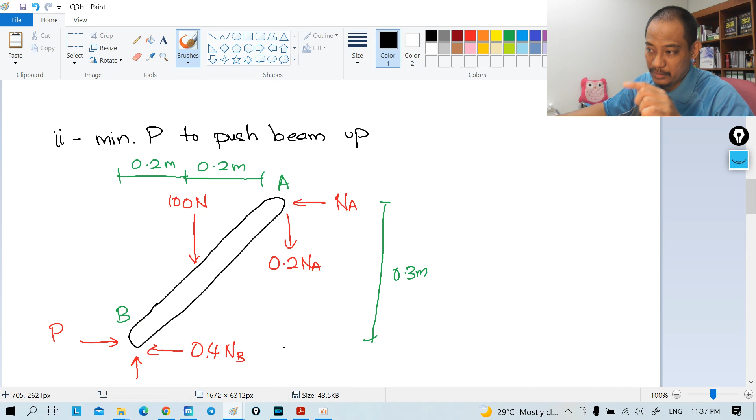And then you have summation of Fx equal to 0, taking to the right as positive. So you have P, and then you have minus 0.4 NB. So 0.4 times 118.18, and then minus NA. So minus NA is 90.91 equal to 0. So you have P, you have 0.4, and then you have NA.

In terms of calculation, if you use your calculator: minus 0.4 times 118.18 minus 90.91, you get, so if you bring to the other side, 138.18 Newton. So minus 0.4 times 118.18 minus 90.91.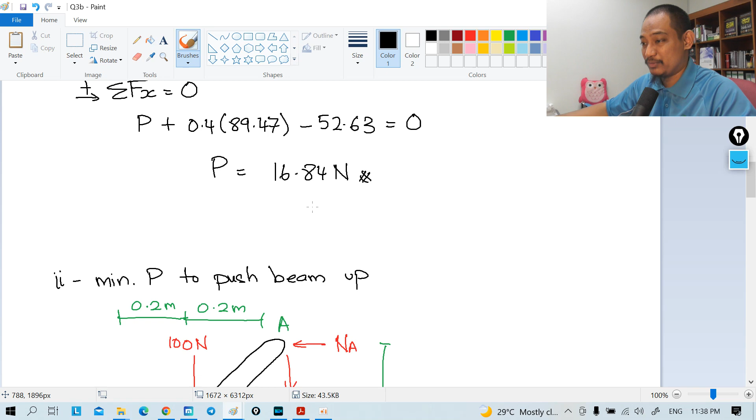So now you have solved what the question wants: P for part A, part 1, and P for part 2, that's the only question they are asking. So we have P for this one. The minimum to prevent from sliding down is 16.84. Minimum to push up is 138.18. Of course it should be much higher because it's to push up, compared to prevent from sliding down.

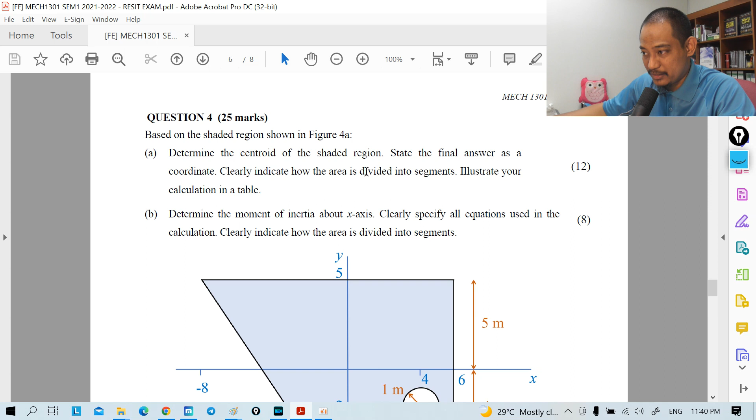Now we're going into question 4. This is question 4, and we have A, B, and C. Part A and B have the same diagram, so we'll go with part A first. Determine the centroid of the shaded region. This is the shaded region, we have to find the centroid. State the final answer as a coordinate. Clearly indicate how the area is divided into segments. Illustrate your calculation in a table. So that's already a hint that we'll use that table for this one.

We can divide this in several ways, and normally I will divide it just by dividing it here. So we have a triangle, rectangular, and then we minus the circle. So that's the area. This is question 4A.

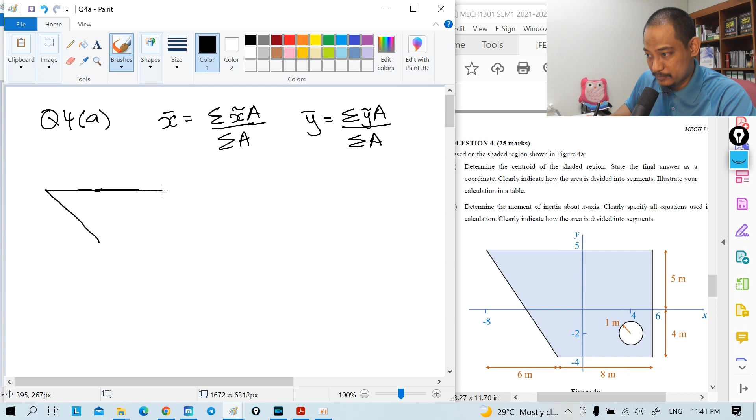Now for centroid, we want to find the centroid, meaning that x bar equal to summation of xA divided by summation of A, and y bar equal to summation of yA divided by summation of A. We'll divide this into different segments. So one way of dividing is we'll divide it in this way, meaning this triangle, this rectangular, and minus that one. So basically equal to this one plus this one minus this one.

So in the form of a table, let's take the dimension first because we would need the dimension. The triangle here, this is 6, and the height is 9. This one will be 8, this is 8, the height is 9, and of course this is 1. Now what is important is where the coordinate of the centroid is. Let's label this as segment 1, segment 2, and segment 3. So we will have segment, and then we have the area, and then we have X bar, and then we have Y bar, and then of course the calculation.

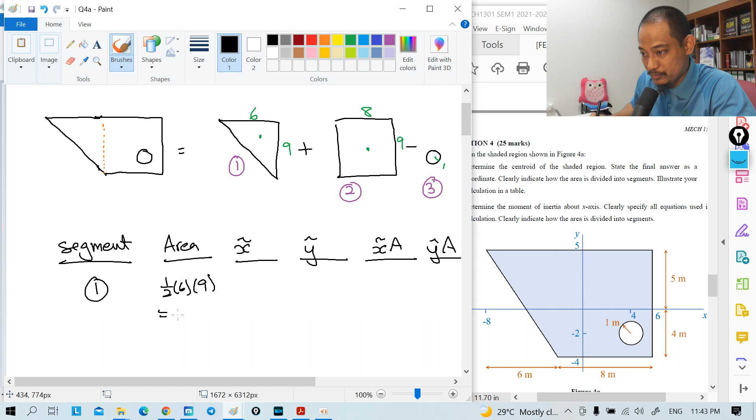So what is the coordinate of this one? The coordinate is... okay, I'll use this one. When you divide like this, the coordinate is somewhere here at the triangle centroid, with the ratio 2/3, 1/3. We know this distance is, because this is 6, the distance should be 2, and the coordinate from the origin - because this is 2, meaning this is 8, this is 6, so this is 2 here, and this 2, so it becomes -4.

This distance is, because the whole thing is 9, the height is 9, meaning this is 3, this is 6, in terms of the ratio. So if this is 6, below is 4, meaning this is 2 - 6 minus 2, so this is positive 2. Okay, so that's the location there.

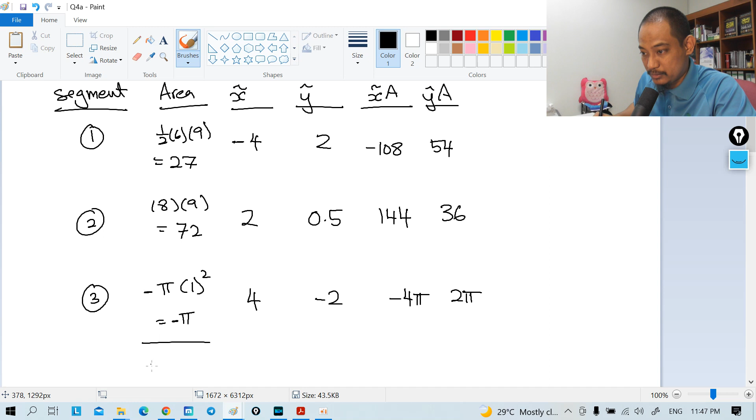So the area, summation of area, 27 plus 72 minus pi, you get 95.8584 if you take the whole thing. What about this one? Summation of x: -108 plus 144 minus 4 pi equals 23.4336. And then 54 plus 36 plus 2 pi equals 96.2832.

So from here, x bar equals 23.4336 divided by 95.8584. You get 0.244.

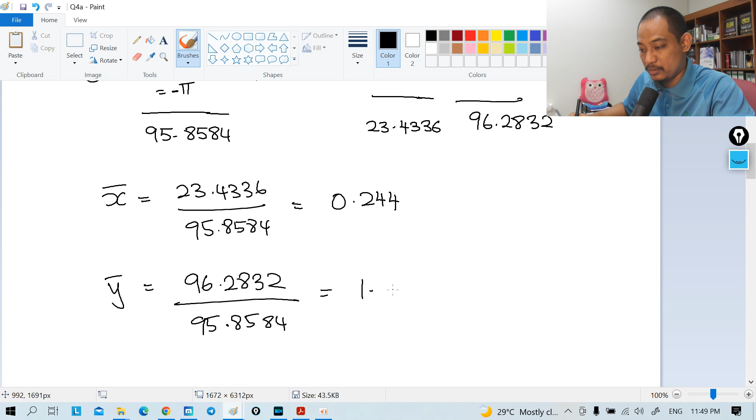Y bar: 96.2832 divided by 95.8584 equals 1.004.

Okay, so this is in meters. In terms of the coordinate, because the question asks for coordinate - it says determine the centroid, which is a coordinate - x bar, y bar equals 0.244, 1.00 meter. That's the answer. Alright, so that's question A complete.

Next, question B about inertia. Determine the moment of inertia about the x-axis, so we need to find Ix. Clearly specify all equations used in the calculation, and clearly indicate the area and how the area is divided. The equation we'll use is basically given in the table here, for example for triangle, rectangle, and circle.

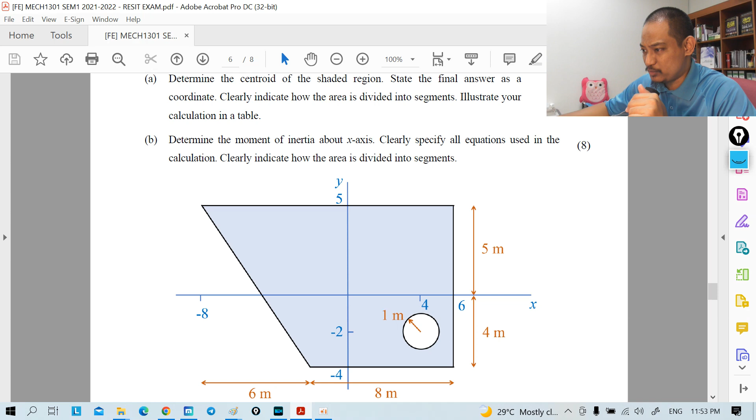We will divide it the same as part A, and because we'll be using the parallel axis theorem for this - meaning, this is question B, we want to find Ix. So we'll be using Ix equals Ix prime plus A times dy squared.

How we'll divide the shape is basically the whole thing divided the same as before. Right now, because we are considering Ix, the y distance is what we want, dy. So for the triangle, we have the triangle plus the rectangle, and then minus the circle.

So for the rectangle, the centroid is here, so the centroidal axis will be there - the x prime axis. And the x-axis is on the lower part, if you look at that. So x is on the lower part. So what is the distance between the two axes?

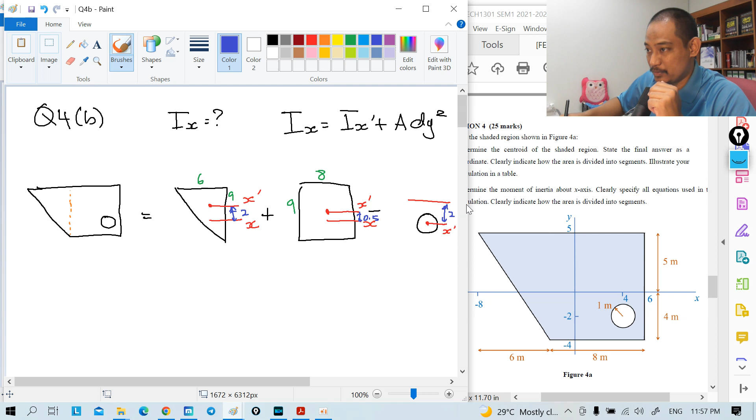And the distance here is 8 and this is 9. And for this one, the centroidal axis is basically there, that's the x prime, and then x bar is above, as you can see there. So the distance is simply from here to here - it's 2, and the radius is simply 1. Alright, so those are the information we need, and then we can calculate using this parallel axis theorem.

Another equation we need is what we can get from here. So basically for the triangle, Ix equal to 1/36 BH cube. For rectangular, Ix prime equal to 1/12 BH cube, and Ix for the circle equal to 1/4 pi r to the power 4.

Right, so going back to the question there. Alright, so solving this is simply using this one. So basically Ix equal to, because we have two parts, Ix prime plus a dy square.

So Ix prime here is simply 1/36, B is 6, h is 9, so 9 cube. Plus a, basically the area is half of 6 times 9, and then we should multiply by dy square. So dy square, dy is 2, so 2 square.

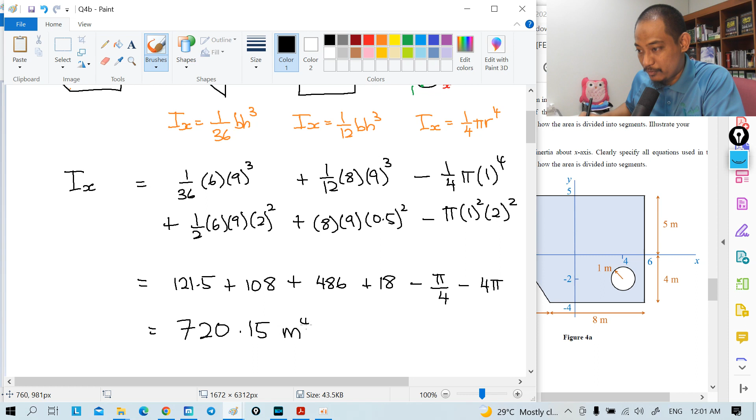Right, so that is Ix. The question only asks for moment of inertia about the x-axis. So this is for part B, sorry - for A is before that. For B, so moment of inertia about x-axis. So we can go for part C now.

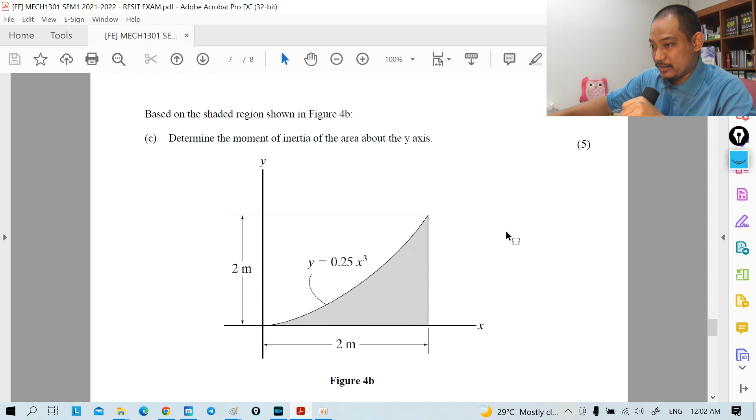Question for C. Okay, so we'll go to question four C. Alright, so this is for C.

Based on this figure, determine the moment of inertia of the area about the y-axis, by integration. This question did not specify any element. We can use horizontal, or we can use vertical. Both will give you the same answer, but I will use vertical for this one because that's easier.

Because this is moment of inertia, right? Okay, yeah, so because it's moment of inertia, alright, we'll go straight into question four C.

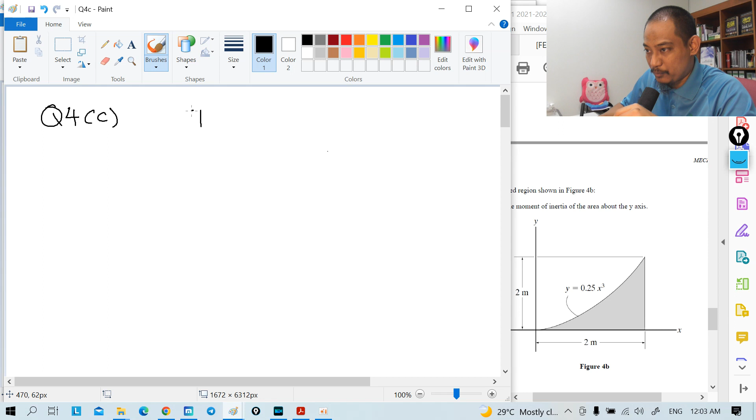Now, if you want to find Iy using integration of x square dA, this is valid for a vertical element, because this is Iy. Ix will be for horizontal, Iy for vertical, right? Because it's parallel to that axis. So if you want to use horizontal, you'd have to use the parallel axis theorem.

So why should I use that one? We'll use the straightforward approach instead. So basically, if the shape is like this, and they have the x-axis and y-axis there, I will be using a vertical element. Using the vertical element, you know that y equal to 0.25 x cubed, and the limit will be from 0 to 2.

So if you take the vertical element, this will be dx, and this height will be y, where y equals 0.25 x cubed. So dA here is simply y dx, and you can plug in y straight away, meaning that dA equal to 0.25 x cubed dx. So we can use that straight away.

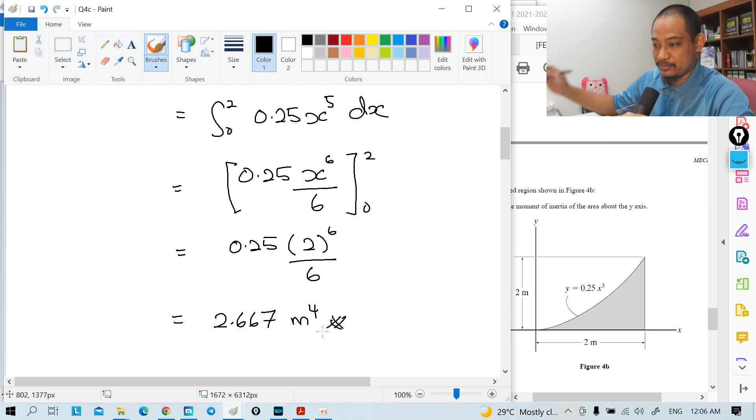2.667 meters to the power of 4, because it's 666 recurring. So that's the end, right? After this there's no more. So that's the final answer. We have accomplished this one.

It's 12:06. If you remember, at the beginning what was the time? We began at almost 10 p.m. If we actually use 3 hours, it should be around 1 a.m. But now it's 12:07 a.m., meaning we actually have a buffer of almost 1 hour. So if you have the discipline of knowing what to do with each question, you can answer all the questions correctly with 1 hour to spare. But of course it depends on the length of the question. If you go back to the previous simulation, I think it's less than 1 hour buffer, maybe 45 minutes or something.

Yep, so of course the questions are not exactly the same length, but all of the questions should be possible to answer in much less time compared to the 3 hours given. Alright, so it's already midnight. I'm not sure if you can see my eyes are already red. It's 12 a.m., it has been a long day and I need to go back home. It's midnight in the office now.